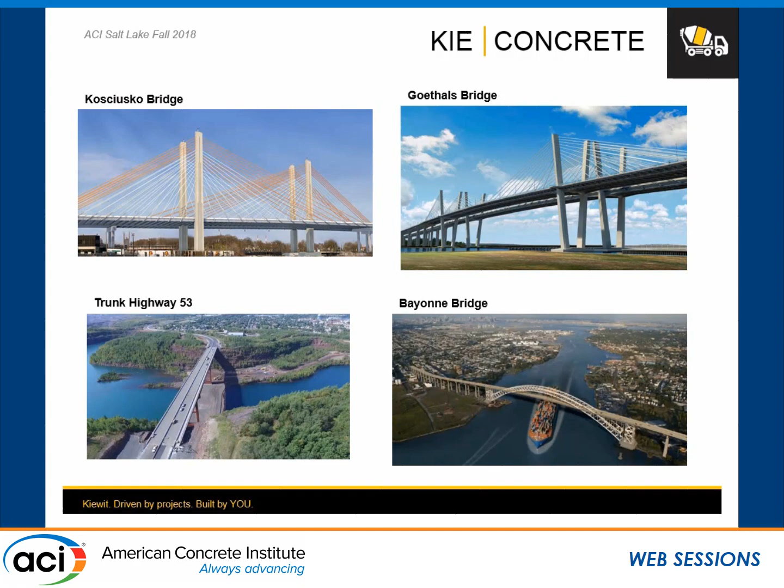Another thing to consider is that not all concretes are made equal. So when researchers go to a bridge that is next door, and they may be in the McDonald's looking at the bridge, and they know that it's easy to pump with 4 inches. Not all the concretes are made equal. So you can see how, extrapolating or even having a statement that is going to cover all bridge decks in the United States and thinking about slump, it doesn't make sense for all the bridges, right?

So these are some of the bridges, some of the conditions that you have to do sometimes, right? You have to sometimes barge your concrete, you have to pump, and there's another photo I couldn't put, but it's pretty much pumping vertically too. And that's the way that you build some of your bridge decks when you are in the middle of the river.

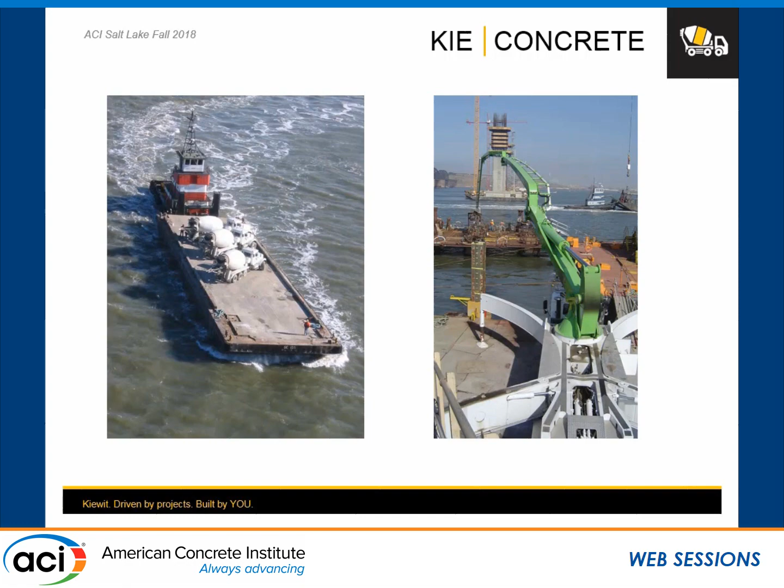Also, even though this doesn't show up in many ACI documents or many people don't realize it, that's how we build work today. That is the way we build work today. If you can see through, you're not doing it right? So that's pretty much your check method, right? Your designers put as much rebar as they can so you cannot see through. If you see through, there's a problem, right?

So think about now, you're going to have to build and consolidate all your maximum 3.5, 4-inch concrete with a water cement ratio of 0.35, silica fume, and all of those good things that you know. And maybe they also put there that you need to use 1.5 inch aggregate, right? Which is already a challenge. We have seen that. So think about constructability, right? It is a little bit of a challenge, but hey, the contractor has the money, right?

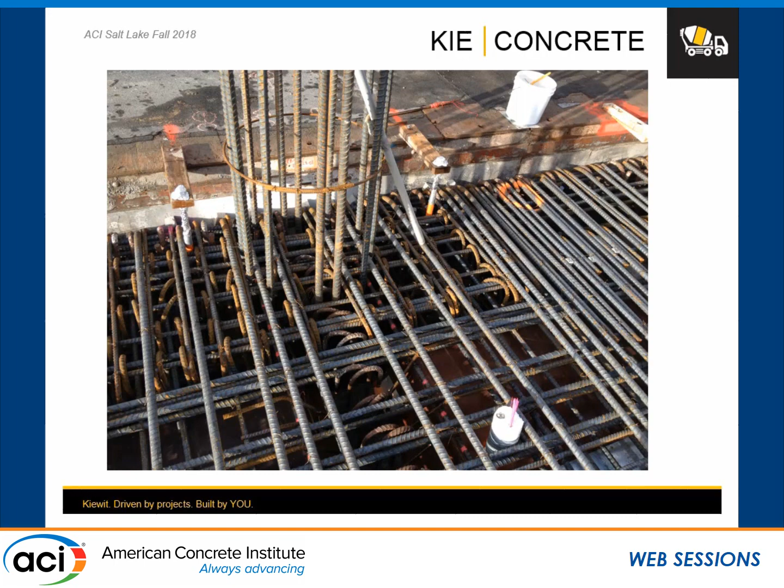And then this is a lot of the things that start to happen when you think about, okay, we were able to decide that the concrete was going to be placeable, but hey, your paver can do it all. You don't overfinish that with your hand finishing because you're going to be bringing paste to the top, and your mix, you should be able to figure it out with your concrete producer. Technologies today, hey, we have so many admixtures. Figure it out. That's what's happening.

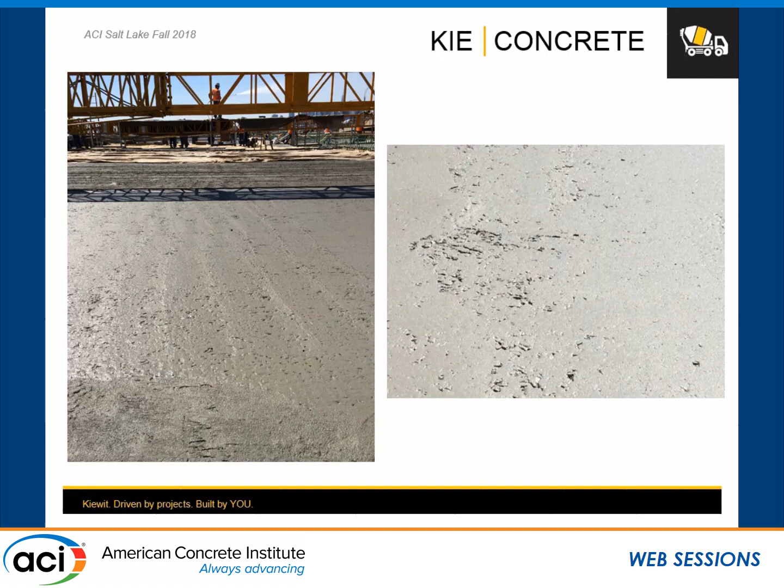But hey, from the lab, looking at how things work in the lab, it's easy. That's concrete for a 100-year service life project. That's how it comes out of the paver, right? That's low water cement, 100-year service life concrete. That's a challenge, right? If you don't cause dispersion to allow that to be finished properly, it is really difficult to finish. But again, I think you guys understand where I'm heading.

But the thing that I want to also mention is that when people are doing research and trying to think and communicate that there's a potential for settlement cracking, I believe there's two things that need to be verified. Is there a crack connected to the obstruction?

So there needs to be a reason to take a core. And what is the undulation happening at the top? So there can be a confirmation that there's true settlement cracking happening and not other mechanisms happening, right? And not trying to extrapolate just because there's transverse rebar and you have a crack that is transverse, that's a settlement crack. That's a flaw in the research.

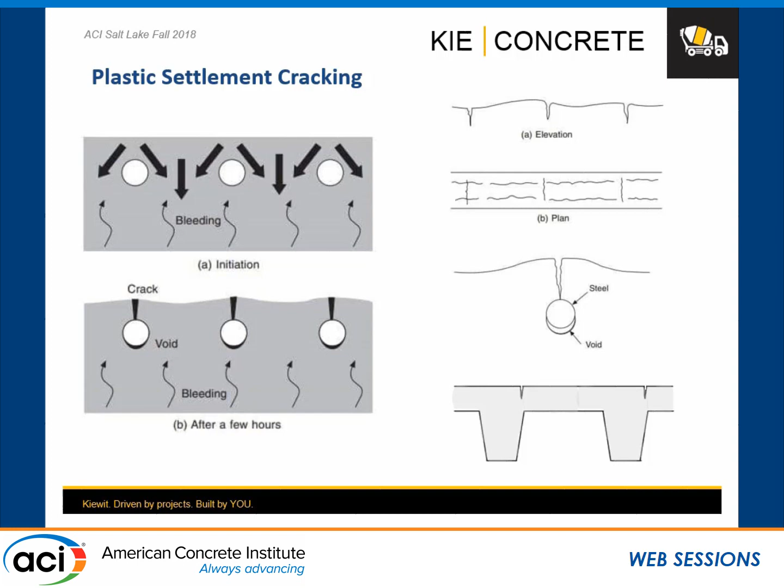The other thing is understanding the cross-section, right? Where your cross-section is, because you may not have a reason to have a rebar obstruction, but cross-section changes can also cause you a settlement crack. So those are some of the basics, right?

If you look at ACI, you can see settlement cracks in bridge decks can be reduced by increasing the concrete cover along with a mixture that minimizes bleeding and settlement. So obviously you're trying to make sure that you have the rebar not too close to the surface, and obviously that your mix is not prone to settlement, right?

And then there's some comments that use of low slump concrete is also recommended to help prevent settlement cracks in bridge decks. And that's where we need to be a little bit more subjective and smart about how it is approached and where that's applicable and where it's not applicable.

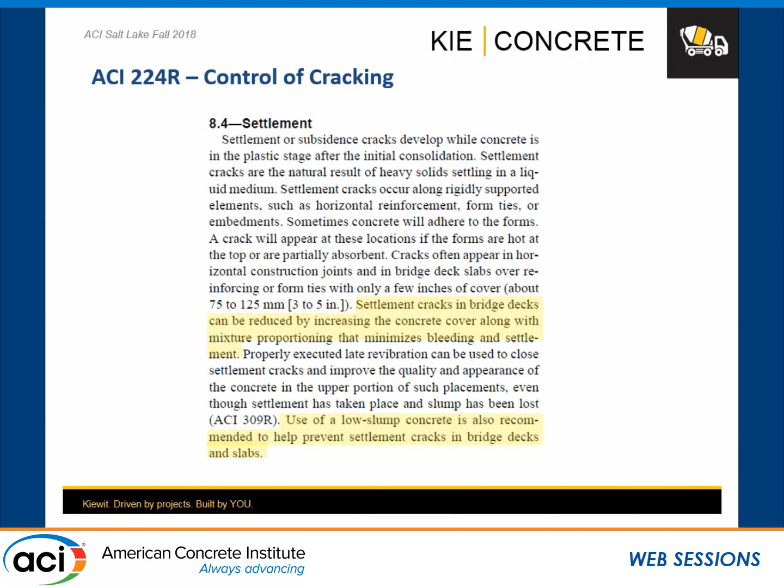If you go back to the 1975 work, which is used as reference, interestingly, still today you see this being the main reference used to talk about settlement cracking fundamentals. You go to research that is done today, and we're talking about almost 40 years ago, and this is still the main research that governs a lot of the discussions today. Even though the whole chemistry and different mixes that we're seeing today may completely affect how we explain settlement cracking today.

But in concept, there were observations that found that increasing slump is likely to increase the percent of the slabs cracked, right? And the same with larger bar size, you also saw that. But then interestingly here, the cover has a very predominant effect, right?

And this is the interesting part, because one of the reasons why we're here today is because when we were talking about settlement cracking in our committee meeting, one of the elements that was not identified as a cause of cracking was the design, right? And it was clearly said that the producer and the contractor are pretty much controlling the effects of settlement cracks. And I automatically had to stand up and try to make the correction, because the structural designers are part of the problem for settlement cracking.

In addition to that, when you go to build a bridge, if you have built a bridge, what a structural engineer tells you is that they don't want the concrete to set too fast. So if you have a 4-hour pour, they tell you they want the entire 4-hour pour of concrete to try to set at the same time.

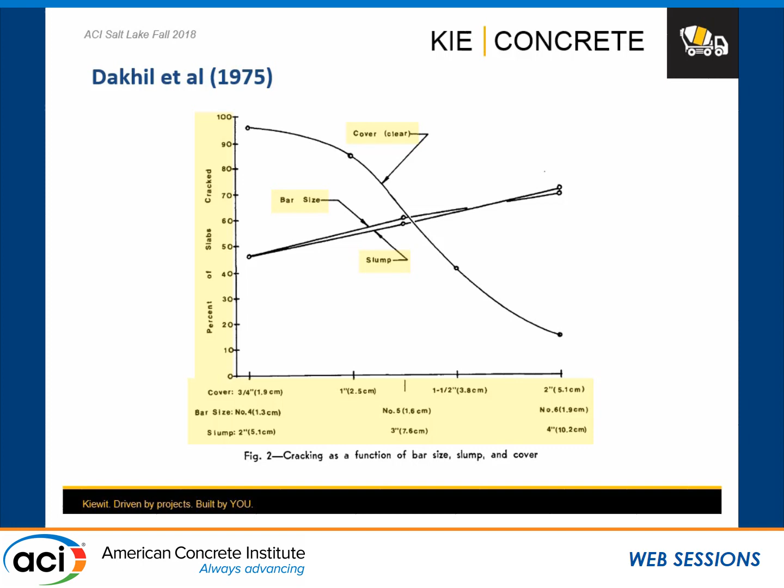And then we have more recent studies by Darwin, and Darwin talks about the impacts from slump on settlement cracking, and then has some of the inputs on the amount of cementitious material. The water-cement ratio you see here is obviously not representative of 100-year service life projects, neither are these numbers. And then the slumps that are really low, that are causing some trouble in the industry. These numbers are also something that you would not see in a 100-year service life project.

Just because of the water-cement ratio you need and the properties you need for scaling, permeability, and all the other things, even though you have a 5,000 PSI requirement, your concrete ends up being 8,000, 9,000 PSI, just because of the other properties, okay? But you're going to hear more about this research later. One of you is going to talk about that research, so it's going to be interesting to hear about that.

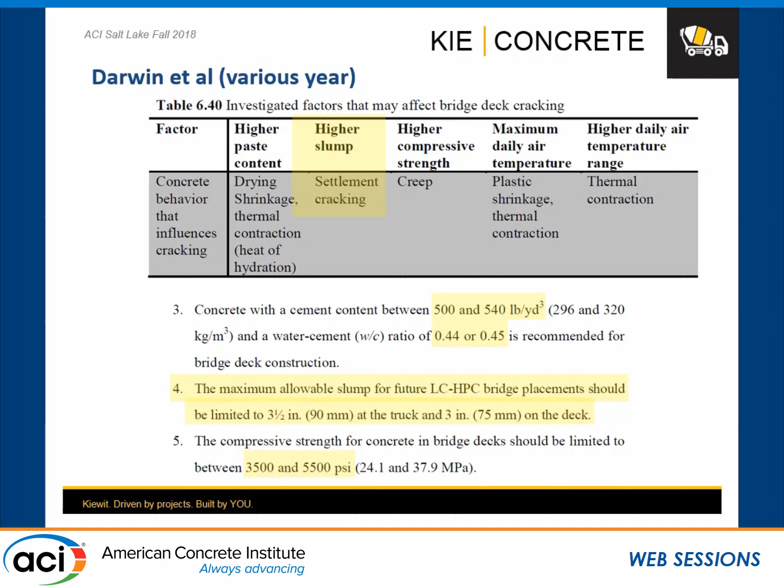So now case studies. I'll just show you examples. Again, no equations. Just keep an eye on the pictures. And I put a dot here on the rebar just to make sure that you could see the rebar was there. The photo was not very clear on the rebar, but you can see now where the rebar location was.

So this was after doing about 60 different placements of the same concrete with the same type of element. We had one time in the winter, one of the crews did not forecast the weather very well. They didn't provide enough cold weather protection. So we ended up having a delayed set in that concrete. Pretty much the concrete temperature was too low. The concrete never got hard until after more than 24 or 48 hours.

But this is an SCC mix, very low water-cement ratio, silica fume concrete, high strength, and it has never had any problem with cracking on the deck. And then we saw that the set time delay caused problems. So then we had to cut sections. We had to remove the whole deck and spend about $3 million replacing the deck.

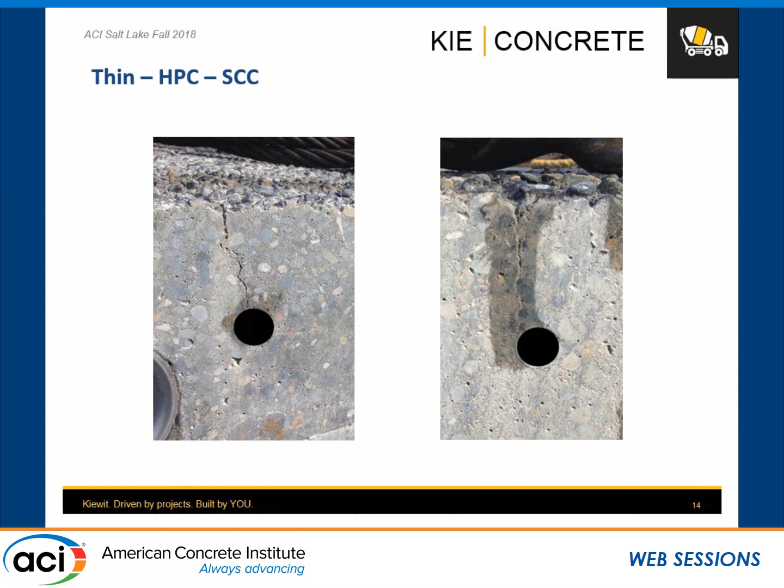But once we cut that, just to learn where the cracking was coming from, we saw cracking coming from the top rebar, which then obviously starts making sense. You don't need to go too much into the scientific theories. But you start thinking about longer set times. The concrete didn't set, it was plastic. Then you have that restriction on top. So you can see the crack pretty nicely, how it shows up from the top of the deck, from the top of the rebar. Then you keep looking, and you ask, where is that crack coming from? Because there's no restriction there.

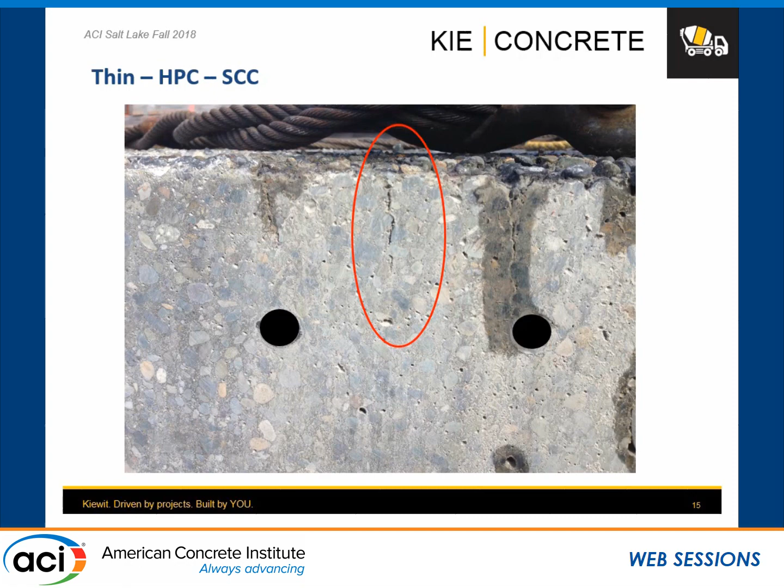So that also shows up, and you can see the other ones coming directly from the top of the rebar. This one actually didn't go all the way through, but you see the restriction and you see the connection, even though it doesn't touch the rebar. And here you see the same effects. You see the crack going to the rebar, crack going to the rebar, crack going to nowhere. And then here there seems to be a crack starting to form, but it doesn't connect all the way down to the rebar.

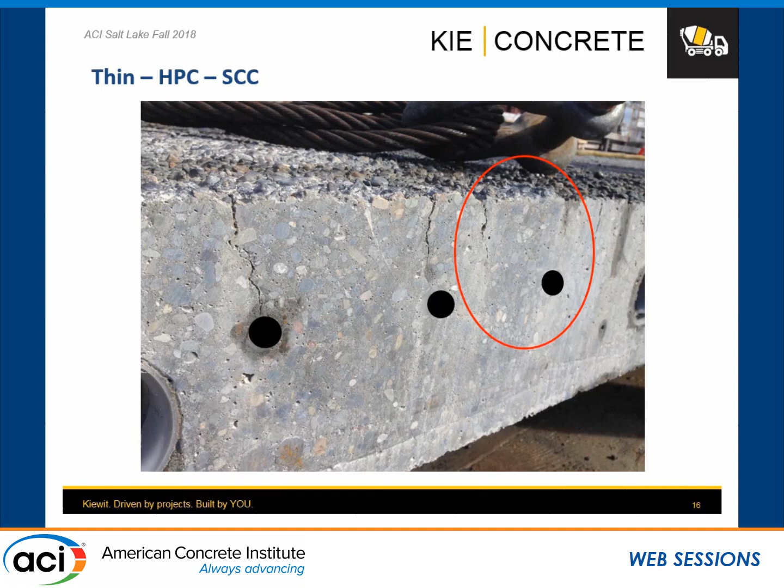But again, the project never had an issue with cracking on these decks. And then the day that you allow the material to set too long, unexpectedly, you end up with this issue. So you learn a little bit about what happened with those cracks. This is a thin element, not a thick element, high performance SCC concrete.

This one is completely different. Now you get to Canada, and we were doing some work there with thick elements, some mass mat placements, mass foundations, and now you're talking about low slump. Slump cannot exceed 4 inches, so you're dealing with 3-inch slumps on average. And the mix obviously is lower heat. You have a large aggregate. You have less cementitious. Your water-cement ratio is above 0.4, so it's not the low water-cement ratio you typically see in 100-year service life. So this is more of a typical mass placement.

Now in this case, we were also in the wintertime, and the amount of retarder was not adjusted for winter. So we ended up again with a longer set time, thicker section. We get a phone call a few days after the placement. And then you can pretty much see, hopefully you can see it there, the crack, the crack, the crack, right? So follow the rebars. And here you have a little more close-ups.

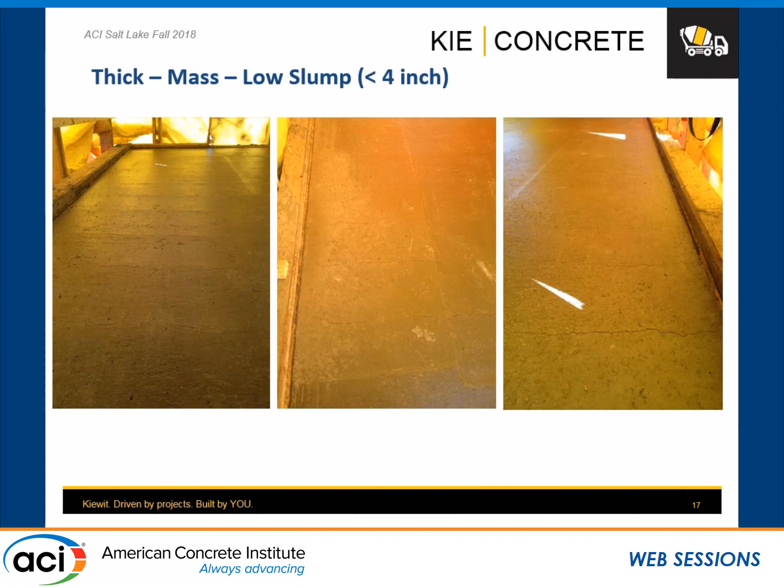But interestingly here, as you see the reflection of the light, you can see the undulation a little bit. So this is plastic settlement by the book, okay? And now we're talking 3.5-inch slump concrete. Still shows the issue. Again, longer set times, cold weather, additional set retarding materials in the mix.

Here you have a close-up of that concrete. You can see the concrete where it cracked. And you can even see here, if you look at the ray of light, a little bit of that undulation too. Now here is a case I always like to talk about, where there's a problem when there's no problems, okay?

So now we're talking, okay, so we have a large mat placement that we know thicker elements have a problem. We know that if you have the low cementitious materials and high water cement ratios, you might end up with a problem. So here is a condition that we didn't have any cracking, okay? And this is more recent work.

This is a little more high-performance concrete from a perspective of mass, reducing thermal, and also strength. So these are over 6,000 PSI concrete for mass placement with high-volume replacements. It had extended workability, a little bit of set retarding, but not enough to overly retard. And we completed this placement with about 7 to 8-inch slump concrete, okay? So now we're dealing with high slump.

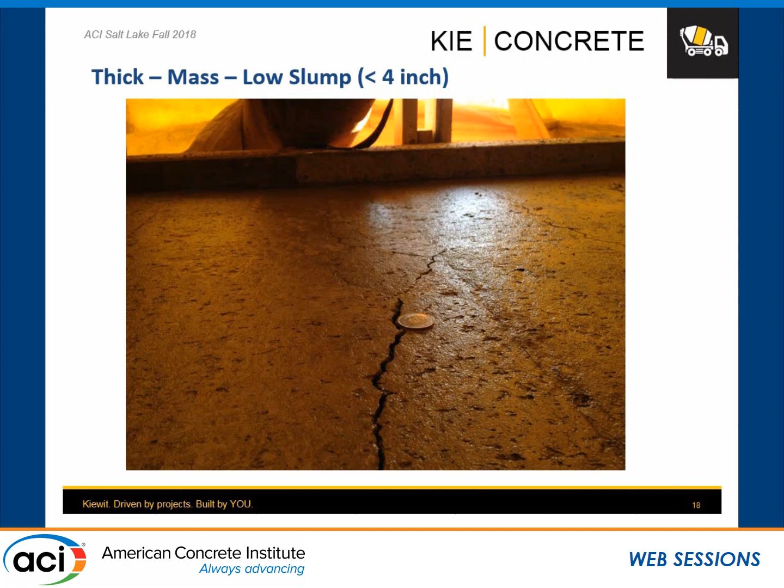So now if I look at my picture here, we say, if I went to 3.5 inches and I got all this problem, I don't want to even think what happened here if I go to 7-inch or 8-inch slump concrete. Now what is different? My water cement ratio here is about 0.38 because I have a high volume replacement of SCMs to get low heat. So then I have a more viscous material, right? And obviously you see no cracking. Beautiful concrete. This is not actually SCC, 7-8-inch slump concrete, internally vibrated with high SCMs.

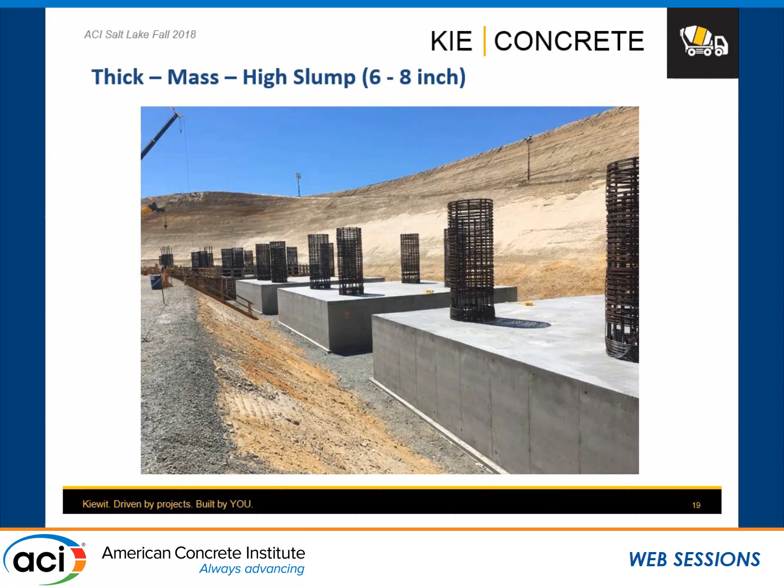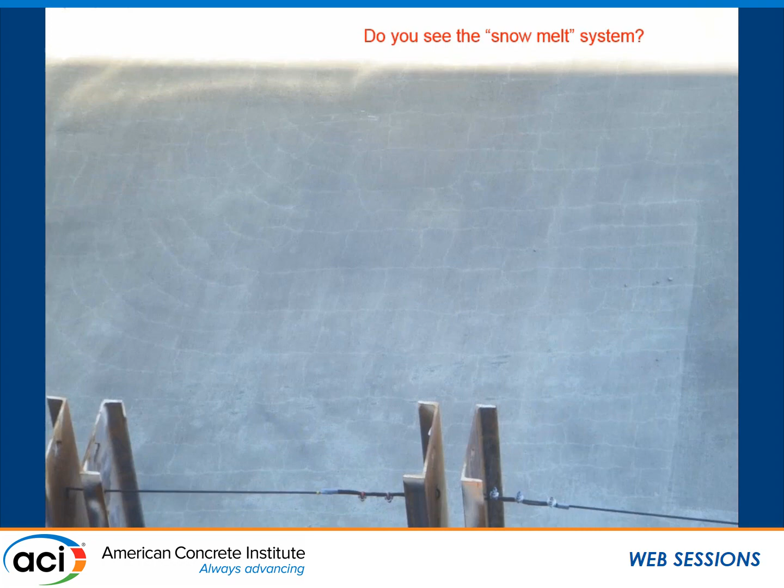So some of the things that I want to communicate from my lessons learned on this. Based on the case studies I show, plastic settlement cracking should be visible within the first 24-48 hours. So when you're reading research and you're seeing attributions to cracking, you know what the first assessment should be? What was the condition after a couple of days of placement? If you see no cracks there, how can you attribute the cracks to a plastic settlement issue? Right? And if you want to verify that, then before you get the cracks, you should drill some cores and see if there's something happening under that concrete.

But pretty much what we saw and learned, when you get settlement cracking, that crack shows up. You're going to see the cracks, and you're going to see them in a couple of days. Obviously, let the concrete cool down a little bit and get dry, and you will easily be able to find it. Now, the risk of plastic settlement cracking, what we found, increases for concrete having a delay or longer set time, particularly at low temperatures, right? So in our cases, it was low temperature related. Obviously, it has set retarder.

But in particular, once you get to that cooler temperature and you didn't adjust your set retarding, it caused problems. Also, the larger, thicker sections showed to be a little bit of a challenge. I wouldn't say that it's perfectly attributed to that. I think it's case-by-case, but it seemed to be a condition where we would take an additional set of eyes. And then obviously the embeds closer to the surface.

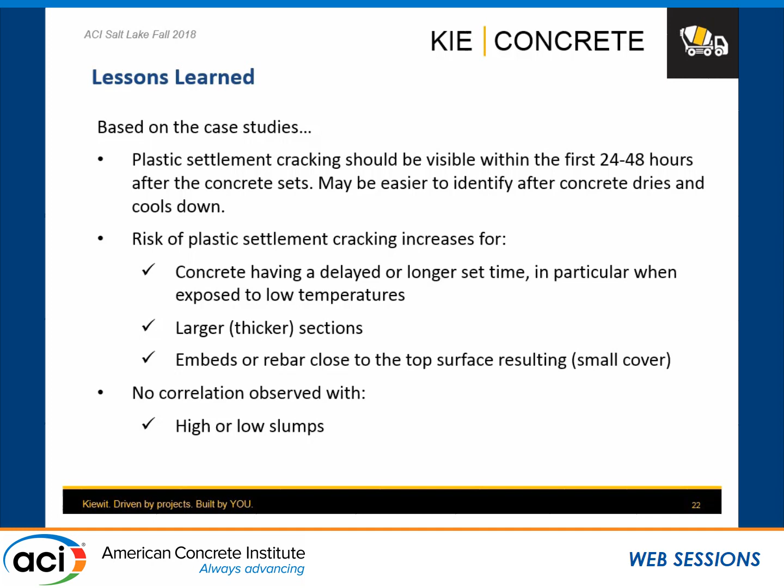But I cannot find in our experience that high or low slumps have been a problem. Cannot. I'm sorry. And it's mainly because a lot of what we do has low water cement ratio. So making a blanket statement and saying that slump is the master of controlling plastic settlement cracking, I'm sorry, I have a problem with that.

So in my closing remarks, I would say that limitations from research can result in misleading actions when the knowledge is used outside of the research scope. If the research scope was to use 0.45 water cement ratio and you saw something that caused a problem, the conclusions are related to 0.45 water cement ratio with the materials that you used in your research. They're not extrapolatable to the entire 50 states for any concrete.

Knowledge from research can misrepresent the intent of durability performance requirements, in particular to meet constructability of 100-year service life projects. Again, we're talking about bridge decks as one thing. Today, modern bridges have 100-year service life with requirements that are making the concrete more difficult to construct. What you build in the middle of your city for maybe 50 years using local contractors may not be what you do for a monumental bridge that requires 100 years. And just saying that that's applicable is wrong.

The potential risk for plastic settlement and slump requirements needs to be evaluated on a case-by-case basis with consideration to the local material properties, mixture proportions, performance requirements, design criteria, and construction demands. Again, this goes from the heart to the younger engineers that are growing and getting into the industry. Don't extrapolate. Be cautious with what you say, because the audience in the industry is believing that just because somebody wrote it in a research paper and it was peer reviewed, the information that is there is right. And that is wrong.